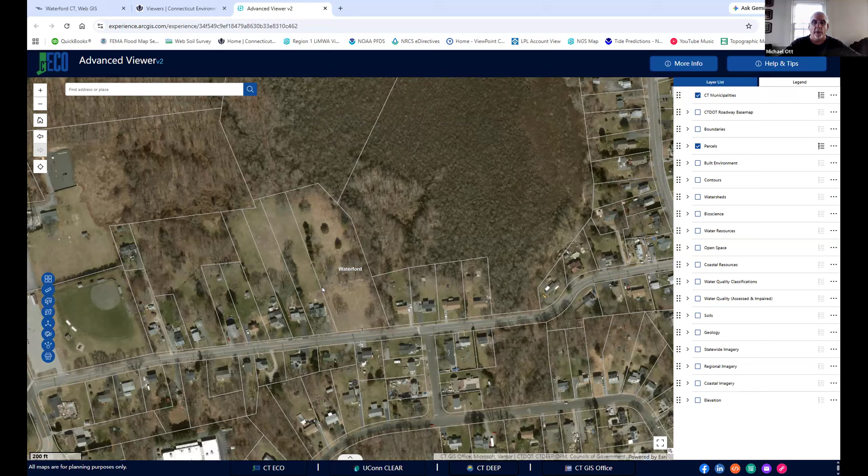This is the parcel, right where it says Waterford. You can see that the parcel today is largely an open field. There's an inland wetland here, again right where it says Waterford, and another very small inland wetland that's actually the result of a historic well that has overflowed for years on the site. There's also a very large wetland complex to the east of the site.

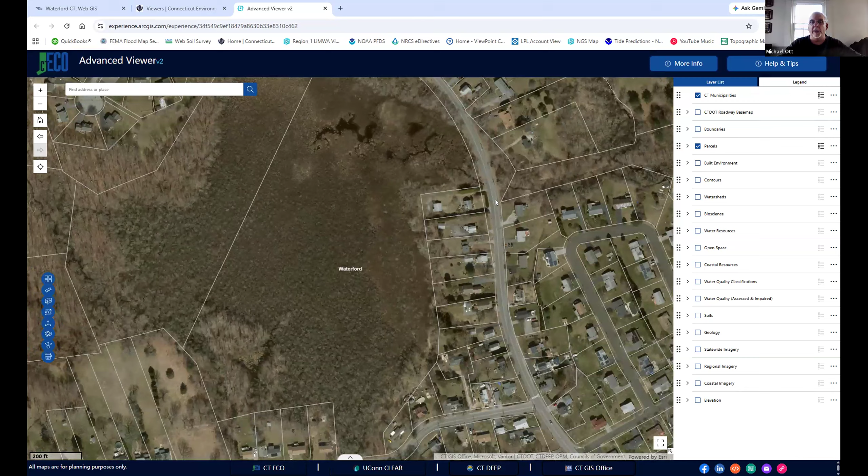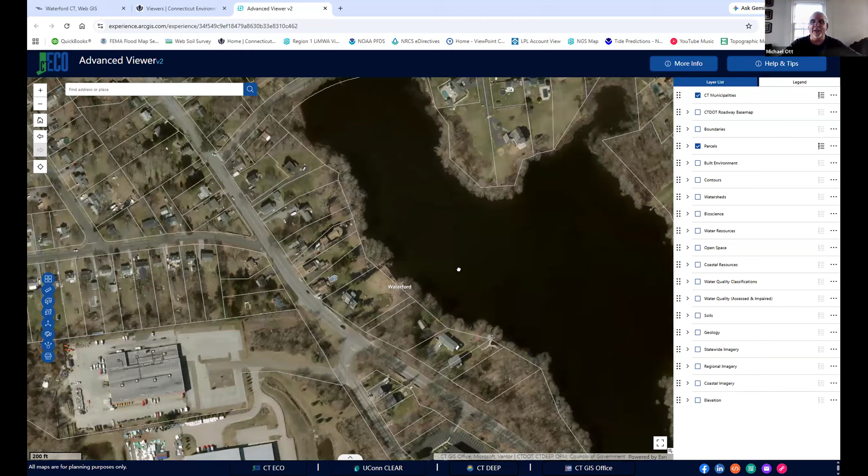Our project site drains to this wetland complex. The outlet from that wetland complex crosses under, I think, Vauxhall Street Extension — Mark, is that correct? Yes, there's a relatively small diameter culvert here, and ultimately this watercourse flows southeasterly and joins what I believe is Brandegee Lake — Lake Brandegee. Yes, okay. So that's how the site drains in general.

So I think I have to stop sharing, and then I'm going to bring up the plans and share again. Bear with me for one second, let me see if I can do this.

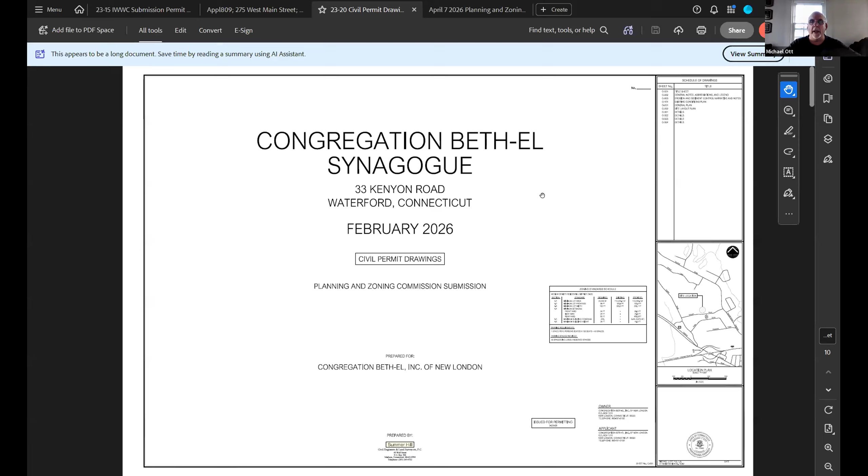Okay, so you should see the cover sheet of the plan set now. I'll scroll down to the site plan, actually going back up to the existing conditions plan so you can all see it. I'll zoom in a bit — Kenyon Road again on the bottom of the sheet, left and right.

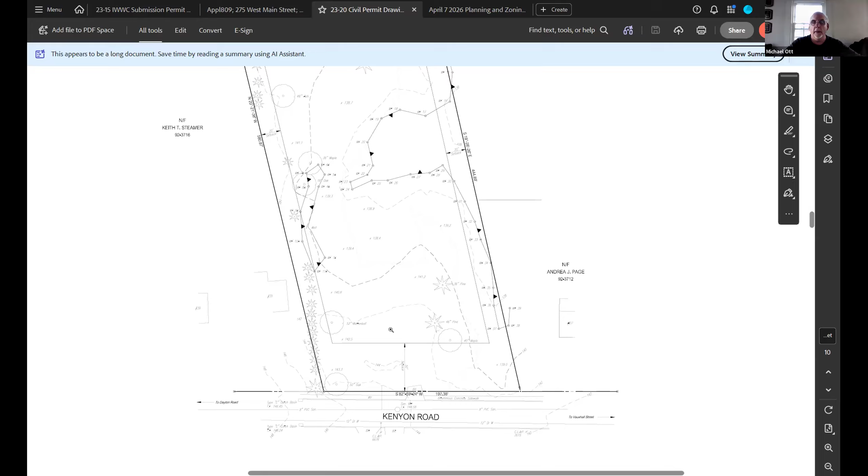This is the wetland I was talking about on the east side of the property, associated with the very large wetland to the east. And this is the very small wetland associated with an historic shallow excavated well on the property along the west property boundary. That well will be abandoned as part of the project. Let me zoom back out a little more.

I'll go to the proposed site plan — please stop me if you have any questions. This project, I don't know if some members were on the commission several years ago, but the congregation proposed a project on the site that had been approved by both the Conservation Commission and your commission. In that previous project, the proposed building was located in the rear of the site, with a long, sinuous access driveway working its way back to that building site.

This proposal, as you can see, proposes a different building. It's a relatively small, one-story building that Dave Atkinson will describe later on, located closer to the front of the site. There's an access drive, as there was in the previous application, in the same location on the west side of the site. The access drive provides access to a small parking area in front of the building, another small parking area at the rear of the building, and a gravel-surfaced overflow parking area at the limits of the rear site disturbance.

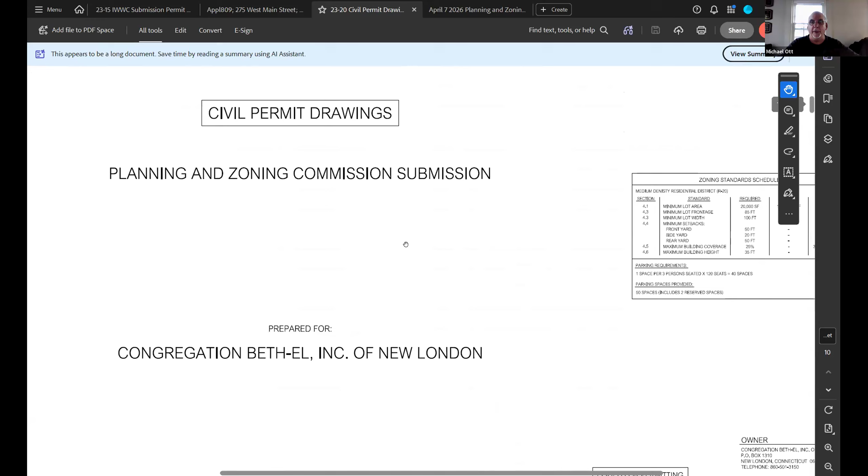There's a total of 42 — I'm just going to go back to the title sheet to double check. I believe it's 42.

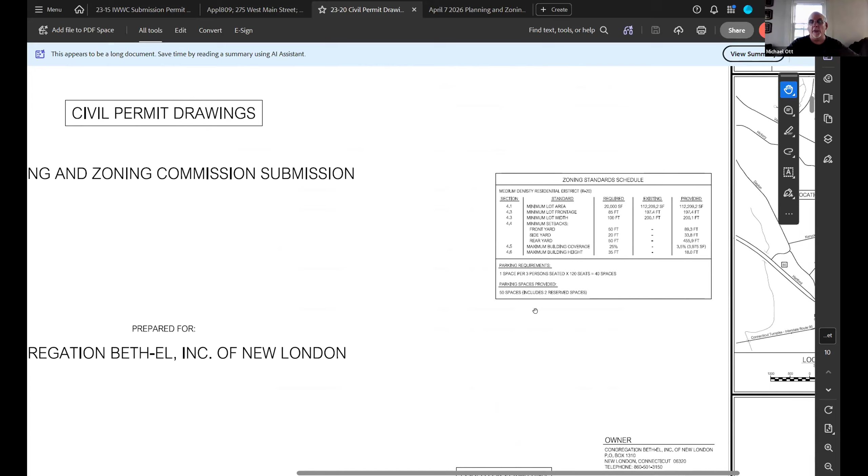It's 40 on the zoning standard schedule on the title sheet. There's a total of 40 spaces required, and 50 spaces provided. That 50 total includes 2 reserved spaces, and includes the gravel surfaced reserved parking area in the rear.

The congregation has told us, and we told the Conservation Commission, that they would rarely use the overflow parking. Kathleen McFadden could speak to this more, but they only have a few events a year that would require the need to use this overflow parking area in the back.

We submit all the building utility services will come from the Kenyon Road right of way. They'll all be underground. There's sanitary sewer and public water, as you know.

We have proposed parking area lighting. We submitted an exterior lighting photometric plan, hopefully you have that in your packets. There are 7 parking area lights total shown.

We showed them, as well as the building architecture and the landscaping, to the design review board earlier this afternoon. The lights are a typical today's version of a shoebox, a horizontal luminaire that meets backlight, uplight, and glare standards. There's no uplight component to the lights. They're all LED luminaires, and the color temperature is 3000 Kelvin.

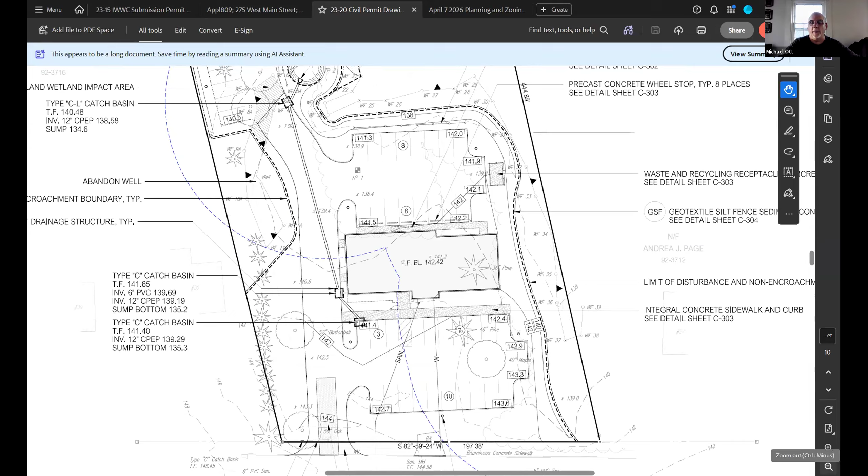Conservation Commission reviewed the erosion and sedimentation control plan. They also reviewed the stormwater calculations that we provided. We provided calculations for the water in accordance with Connecticut DEP's Stormwater Quality Manual, to show that we meet the water quality and required retention volume criteria of the manual. Again, the Conservation Commission reviewed those.

I know that was quick, but I'm watching the clock, and I think I ought to stop there in case the commission has any questions for me, and then I'll turn it over to Dave Atkinson, the project architect.

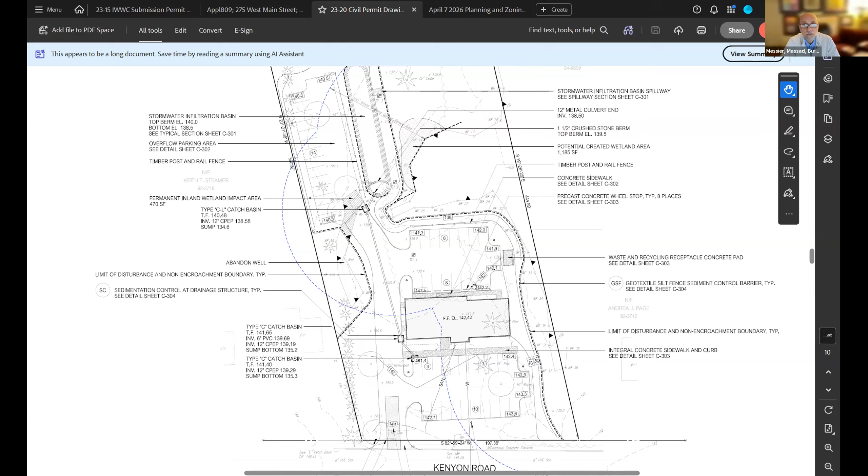What happened to the first project? Because when I saw this, I said, I could have sworn, unless I'm having deja vu, that we already approved this project years ago. So what happened to it?

I think Kathleen can speak to that. It was a beautiful building, it just was way too much money. We didn't have that kind of money. The long driveway and the building itself, it was a very expensive building.

And then I have one other question on the EV parking spots. Are there any? No, we did not actually show any. We could, but we did not.

Mark, what's our position on the statute that requires us to do it? I don't agree with it, but I don't know that we have any say in it. Mark, you're on mute. Oh, and just for the record, Tim Condorino has entered the meeting too, sometime during Mr. Ott's presentation, if the minutes can reflect that.

Zoning regs right there, blue book. The state statutes require 10% of parking spaces to be EV ready, not necessarily have EV facilities installed, but able to provide for EV. There is a minimum number of spaces which puts you into that threshold. Off the top of my head I don't recall that number, but I think it's 30, could be with that statute.

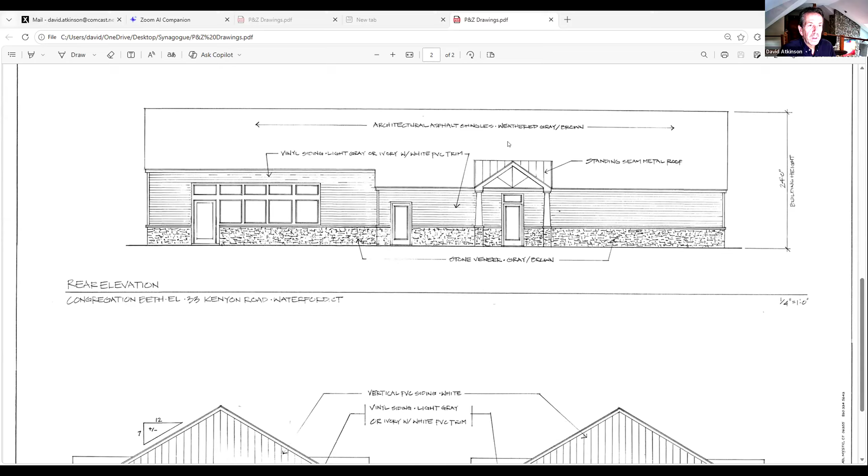Scrolling down, looking at the rear elevation. Again, the same palette: the wainscoting of stone veneer, vinyl siding, some windows in the sanctuary, a small rear entry portico, same shingles, and then on either end of the building the same stone, vinyl siding, and some vertical siding to break up the expanse of the large wall there.

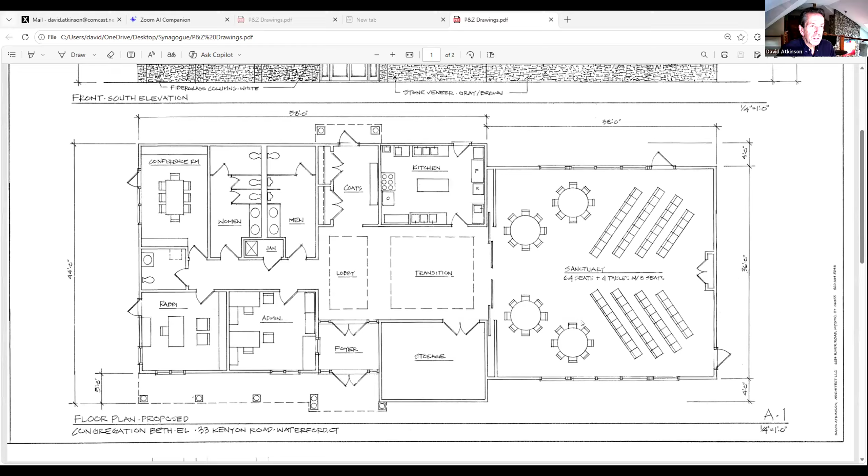Again, the intent was for the building to blend nicely into the residential feel and character of the neighborhood. And that's really about all I have.

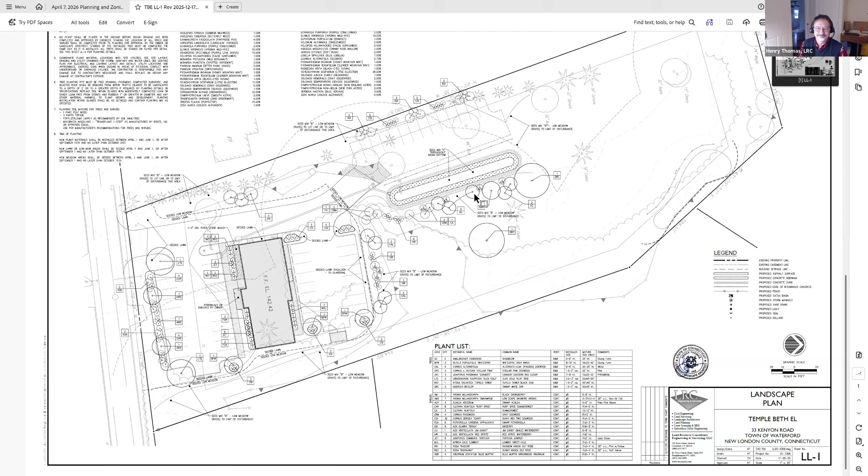Happy to answer any questions if you have some. Thank you for your patience. Is there any questions for Mr. Thomas? Okay, I don't see any questions. Do you have anyone else for your presentation?

I believe that is the entirety of our professional presentation. It is. Ms. McFadden, would you like to talk?

I would just like to say that we've been homeless for a long time. We sold our synagogue in 2017, and our first attempt, we just didn't have the money to build that particular building. We're really excited about this one. We think it's a beautiful design. It's the right size for us. We can afford it. So we're really excited to be here and looking forward to building a new home.

Great. Welcome to Waterford. Thank you. Okay, we're just going to—you know what, why don't we just skip right to the application review for you?

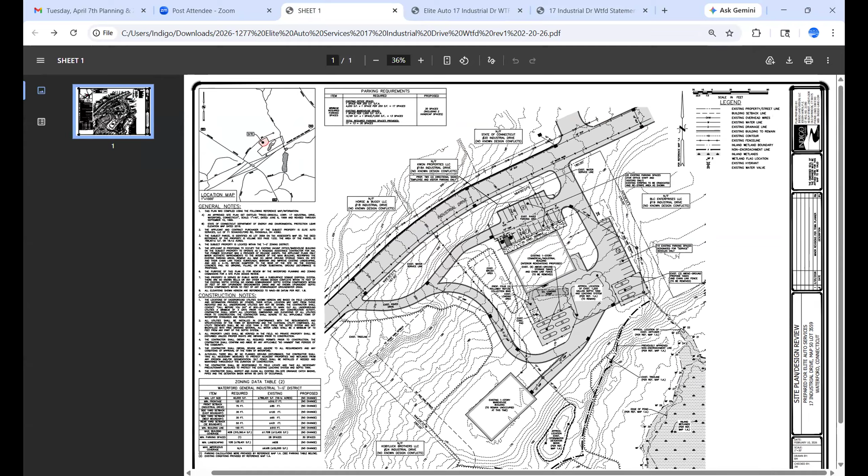So here, if you could see the site plan on the screen now, is the site plan of the existing facility. These roadways, these access driveways coming in from Industrial Drive, are all existing. The parking in the front between the street and the building is existing, as is all the paved area behind the building.

There's also a second building that was added to the site in the past, and they have no proposed uses for that building right now. It will just remain vacant for the time being. They will occupy the main building.

Utility vehicles are over here on the side, those 10 spaces to the side or rear of the site. And then in the front, there are 20 - 11 up against the building with 2 handicap parking spaces, and then 9 more closer to the street.

To the rear of the building, here is where all of the 9 tanks are. There are 3 propane tanks on this corner that either have already been removed or will be removed. The chain link fence around will also be removed. The pavement will remain, but the tanks and the fence will go.

Similarly, over in this corner, there were 6 above-ground storage tanks used for the former release agents use. Those are all proposed to be removed from the site along with their chain link fence as well. The asphalt will remain with the existing footprint, but all of the tanks and the fencing will be removed.

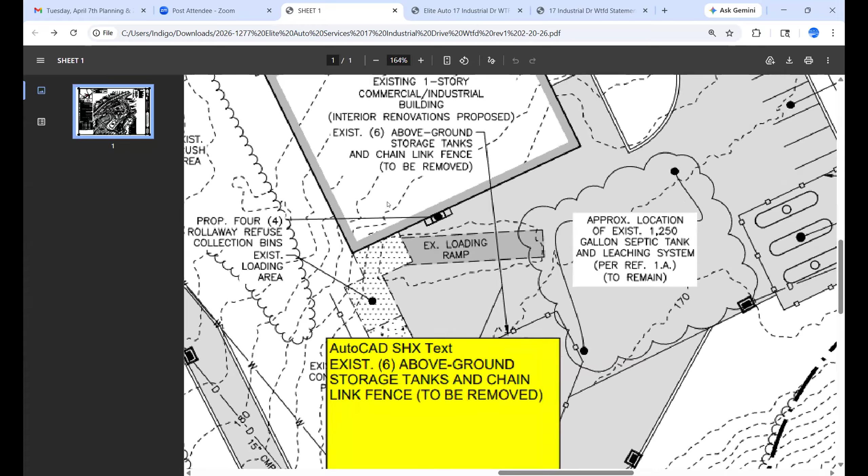To the rear of the building, on this site plan, for trash disposal there are 4 roll-away bins that will be hidden and stored behind the building, then brought to the street for refuse collection when necessary.

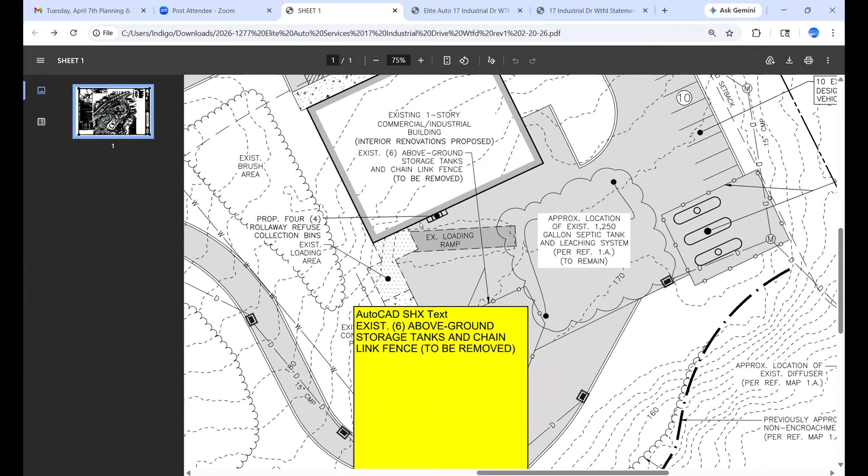So in a nutshell, that's everything that we are doing.

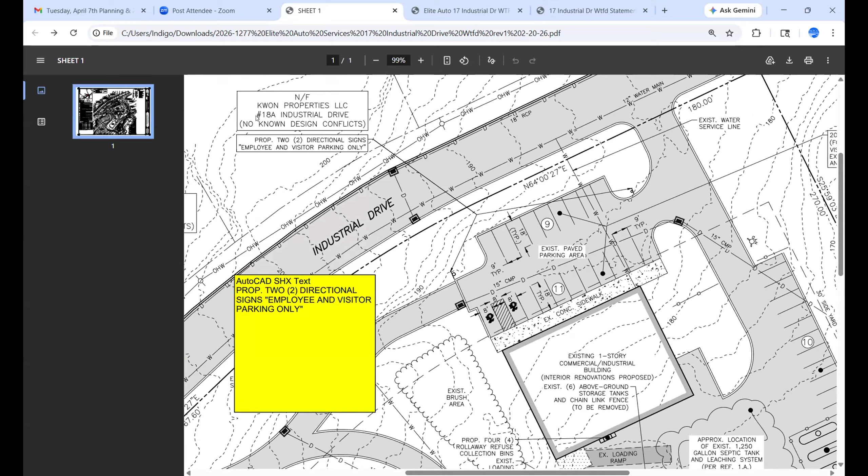I could show you that signage as well, because that was one important thing. We have one directional sign there, and another one on this side. There's a call-out for 2 directional signs that will say employee and visitor parking only, so that all of the company vehicles, tow vehicles and so forth would be stored in these spaces along that side.

So that is everything in a nutshell. If there are any questions, I certainly can try to answer those.

Okay, can you stop sharing the screen for a second? There you go, thank you. Yep.

So I have a question - so you're just AAA for breakdowns, you're not towing illegal parking lots or anything like that.

Yeah, it's just their contract with AAA. So when there is a vehicle that is broken down somewhere, they will leave the site to go get that vehicle, or if they're out on the road already, go get that vehicle, bring it to its designated location, the repair garage or the auto body shop, whatever it may be, and then return back to the site at the end of shift. So there will be no bringing of random vehicles to this site.

Okay, any other questions for Mr. Wren?